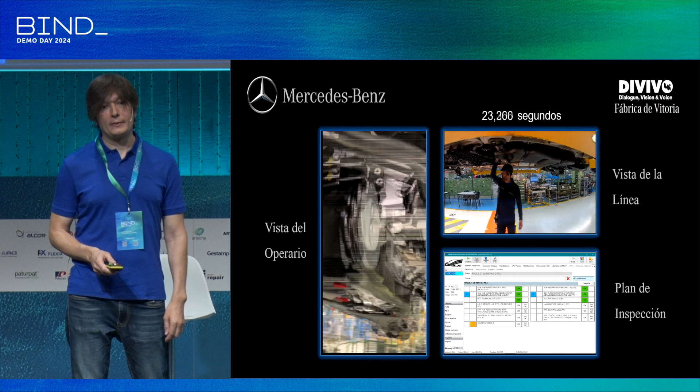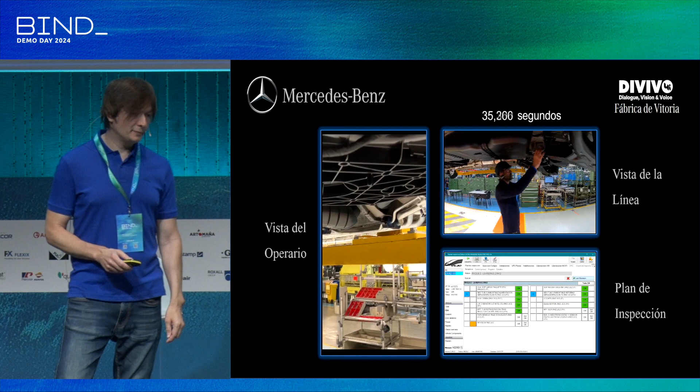As we have seen in the video, Divivo can work both using simple voice commands and also natural language communication to provide on-site assistance to operators.

Conversational AI brings remarkable benefits to industry. It boosts productivity by improving first-time right performance, increases efficiency by providing real-time assistance to operators on the shop floor, and creates safer work environments by allowing operators to work without the need of removing any security equipment, avoiding distractions, and, when possible, uncomfortable body postures while performing repetitive tasks.

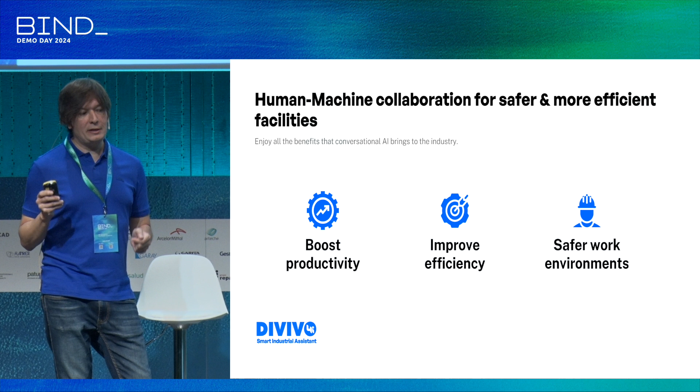Divivo comes with a set of features that make it an ideal assistant for industry. It's robust, reliable in real-life noise environments, can be deployed cloud-free for better privacy, and is highly scalable.

Conversational AI is already here, and at 4i, we're really happy to help you to get the most of it and enjoy all its benefits.

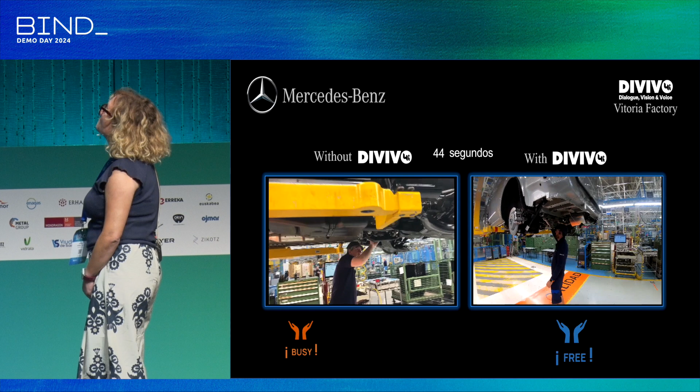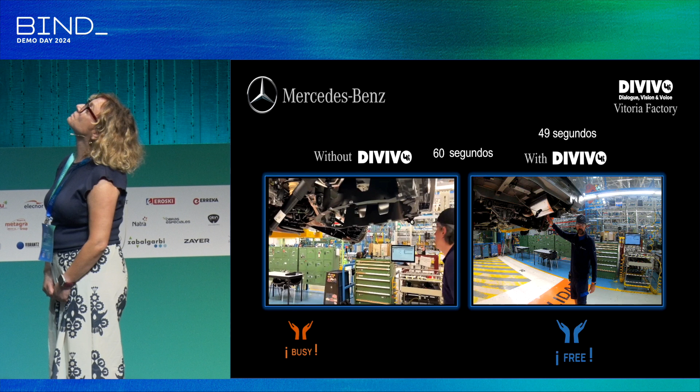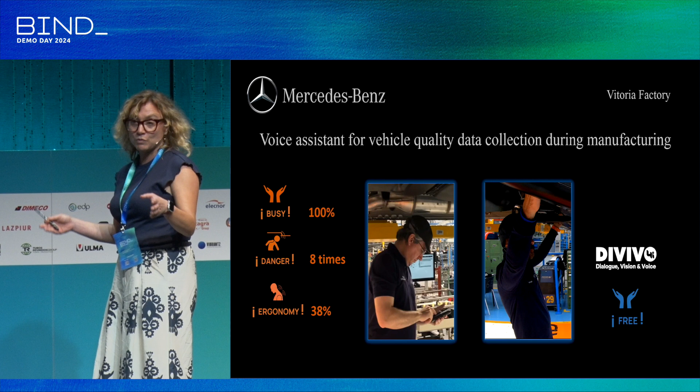As you have seen, with this voice assistant, checking is hands-free. This ensures a simultaneous and therefore more robust process. Also, ergonomics increases and risk situations are avoided. To summarize, with this voice assistant, our scope is double: we gain time and performance.